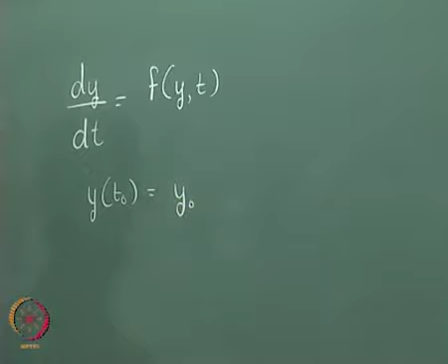So what we are interested in doing in case of ODE solving is find the value y as a function of t, starting with some value y0 given at time t0. We start with this particular value y0 and then try to get the overall curve y of t as a function of t. Let's say that if we have an analytical solution for this particular problem, it looks like this particular curve.

So what we are going to do is, the function f of y comma t at time t0 and at the value of y0 is going to be nothing but this particular slope that we have. This slope is going to be f of y0 comma t0.

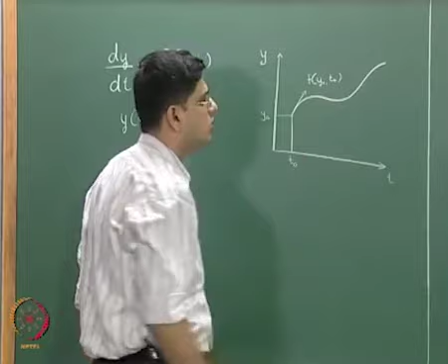So what we are going to do in ODE solving is use this particular value of slope in order to predict or move on to the next point, which is going to be y1 comma t1. Now this particular next point can either lie exactly on the actual curve, but usually there are errors associated with any numerical technique.

So what is going to happen is that the next point is not going to be the white point that I have shown. I am going to use white curves to show the actual curves, and yellow dots to show the numerical solution.

So in the ODE solver, based on the ODE solver, we will reach the point shown by the yellow x over here. Then the function value f of y1 comma t1 is going to represent the slope of the numerically computed curve.

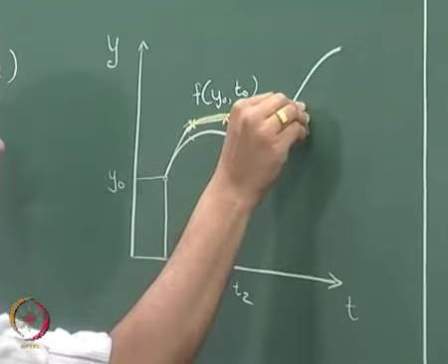Based on the slope we compute from time t1, we will move on to time t2, and the slope might be like this, and we might end up at this particular yellow point. We will keep continuing this over and over again, and perhaps finally the curve we get looks something like this.

So this is the numerical solution and this is the actual solution to the problem. So what we are interested in doing when we try to solve an ODE problem is getting the curve y as a function of t.

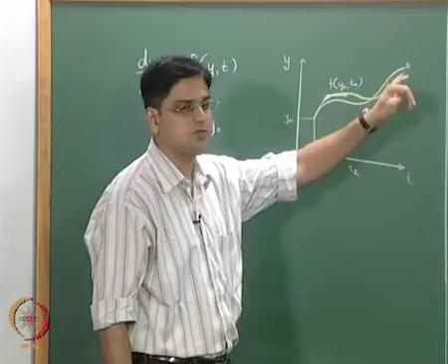Now when we are actually solving the integration problem, we are not interested in getting this curve y as a function of t, but instead we are plotting the function f of t against t. This function f of t represents the slope of this particular curve at various points, and let's say that slope f of t represents something like this.

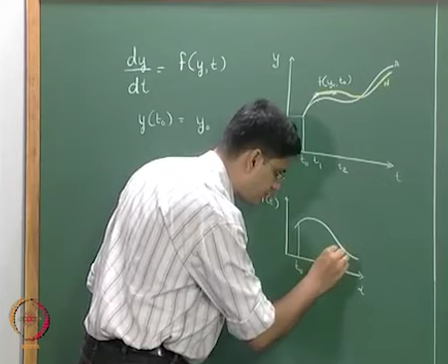In that case, the integral from a to b, or integral from t0 to tn, rather than saying t1 let me call it tn, that integral is going to be the area under this particular curve. Now the first difference we find is that for the ODE solver we have this function f, which can be a function of both y and t.

In case of an integration, it is going to be just a function of t. That is going to be one difference.

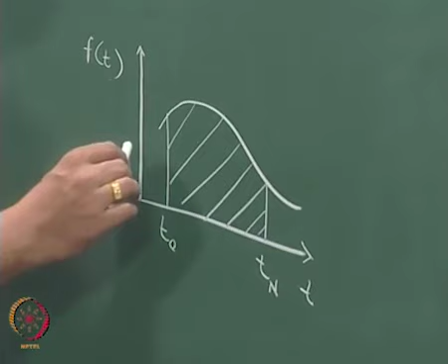The second difference is that the integral is an area under the curve, whereas in solving the ODE we are actually trying to trace the curve y of t rather than looking at the curve f of t. That is the other difference between ODE and integration.

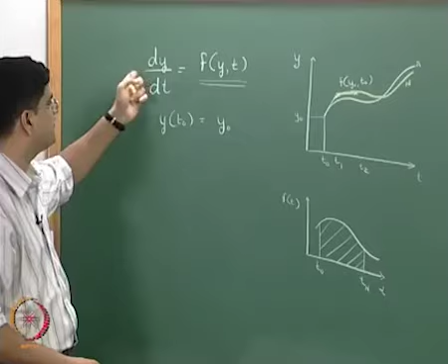The third difference is that because this function dy by dt is in general going to be a function of both y and t, the ODE solving method is going to be a more general way of solving these problems rather than an integration method. That is the third difference.

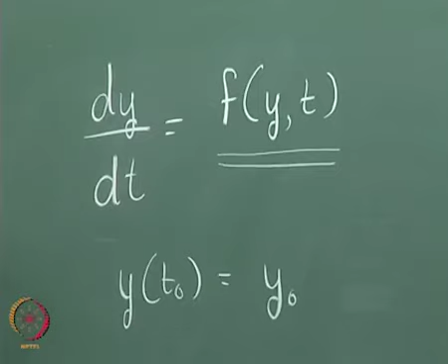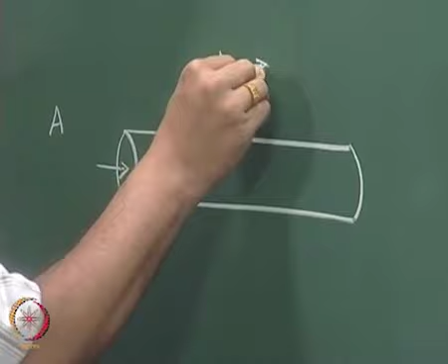Now let us look at the PFR problem. What we physically mean by the plug flow reactor problem is, let us consider we have a tube of this sort. Let A be the area of the tube. At the inlet, we have the system flowing in, a solution of any particular compound, let us call that compound A, and the reaction goes from A to B, and ACS is the area of cross section of the tube.

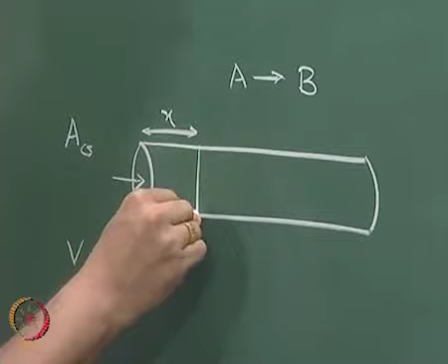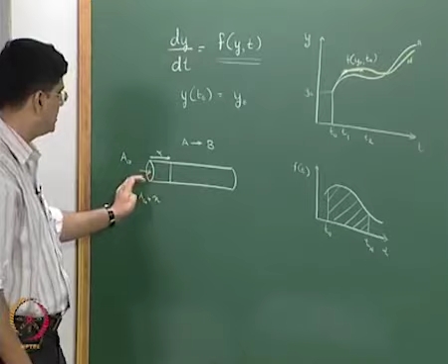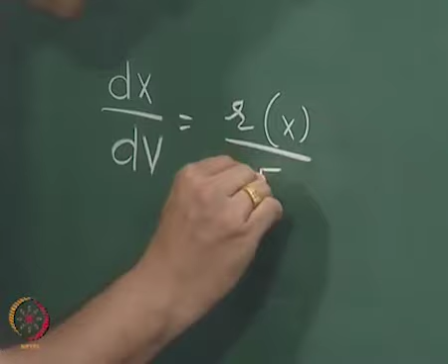So the volume is going to be nothing but ACS multiplied by x, where x is any distance from the inlet. So what happens is that species A keeps getting converted to species B because of any reaction that takes place within this system, and the overall equation for this system can be represented as dx by dV equal to the rate of reaction R, given as a function of x, divided by F. So this is what we get as dx by dV.

So now in the ODE solver, what we are going to do is find the conversion as a function of the volume of the PFR.

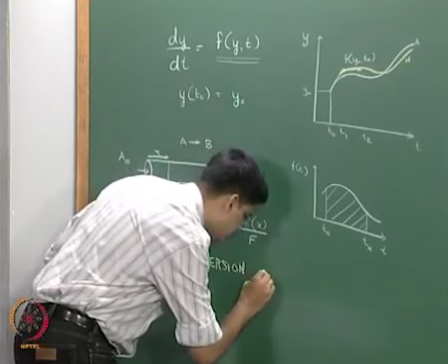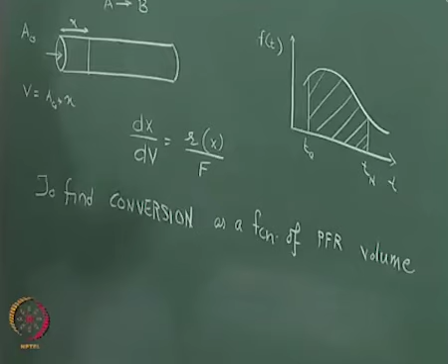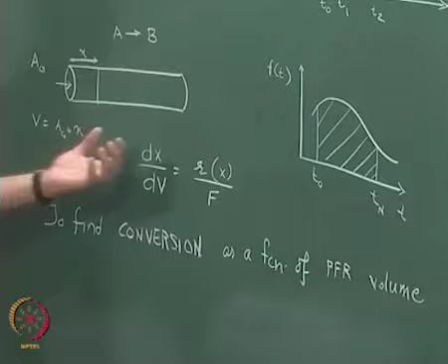If some of you have already gone through reaction engineering courses, you'll perhaps recognize this. If not, I'll give you an overview. As species A enters the plug flow reactor, it gets converted because of the reaction to species B, and this equation represents how quickly species A gets converted within the reactor.

X represents conversion, that is, what percentage of species A has been converted to species B. So what we get if we plot conversion against volume...

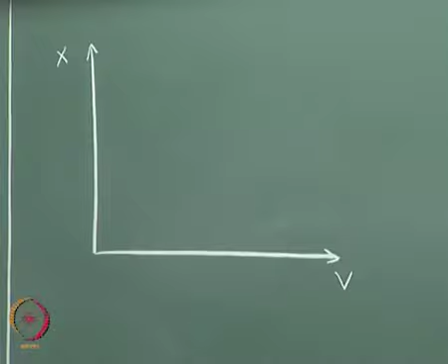Initially when the concentration of A is high, closer to the inlet, the rate of reaction is faster, so A gets converted very quickly. At the inlet the volume of the reactor is 0, and as we keep going towards the right, the volume keeps increasing. As the volume increases, the amount of A converted increases.

The rate of conversion of A is very fast right in the beginning because there's a lot of A available for reactions. As we go towards the other end of the reactor, as the amount of A depletes, the rate of reaction reduces. As a result, the conversion curve as a function of volume looks somewhat like this: high rate of reaction in the beginning, then it tapers off. Maximum conversion is 100%, the conversion cannot exceed 100% at any given time.

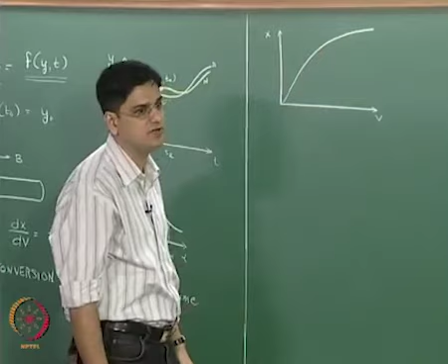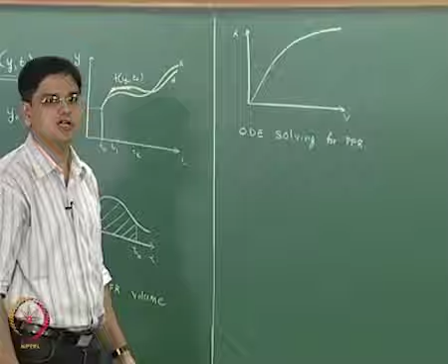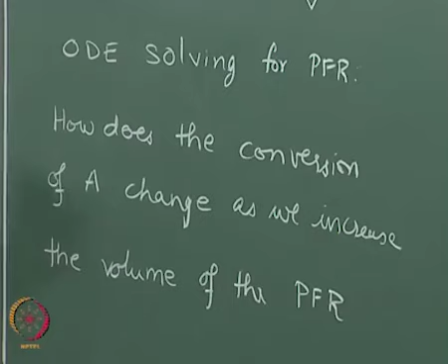So in ODE solving for a plug flow reactor, the question we are trying to ask is: how does the conversion of A change as we increase the volume of the reactor. This is the question that an ODE solver is trying to ask.

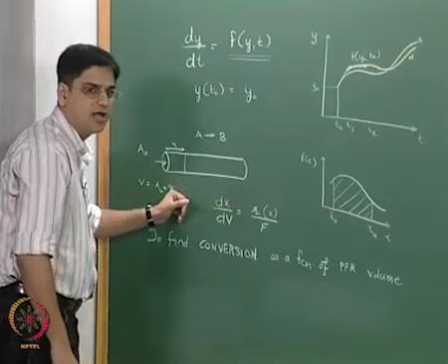Now we'll rewrite the same equation in a different form. We take dV on this side, and F by R to the left hand side, and write this as dx divided by R of x multiplied by F. I missed FA0 to keep it consistent with the previous lecture's notation: FA0 multiplied by dx divided by R of x is going to be equal to dV.

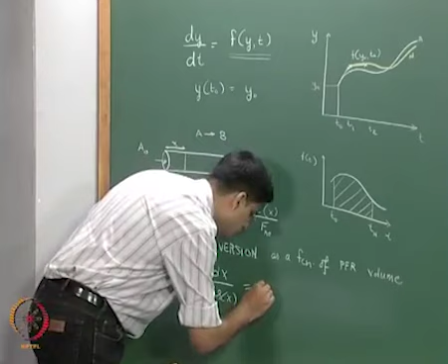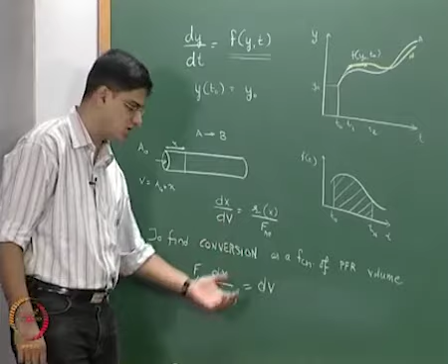Now if we plot 1 by R as a function of x, the volume required to meet a certain conversion is going to be the area under the curve.

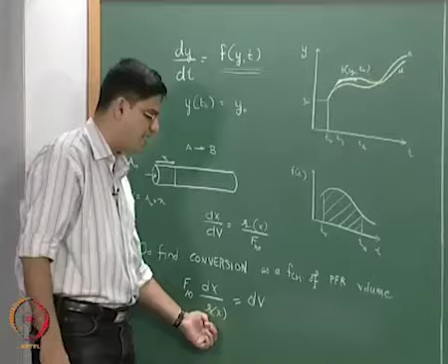So what we plot is FA0 divided by R of x, ignoring the negative signs, as a function of x. We plot how the value FA0 divided by R of x changes as the conversion changes, and let's say that value changes like this. So now the question is: what is the volume of the PFR required to meet a certain conversion?

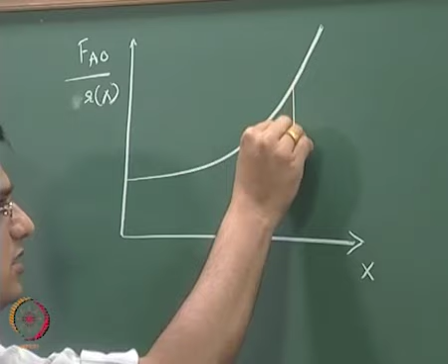In the previous module, we wanted to get 90% conversion, that means x equal to 0.9. So what is the volume that gives you 90% conversion? The volume that gave us 90% conversion was the area under the curve.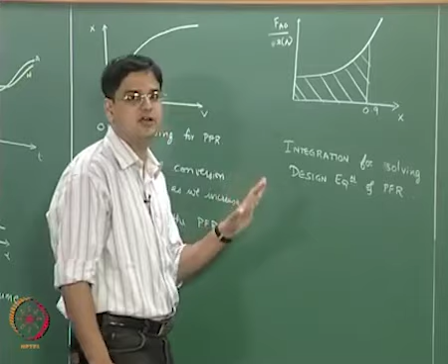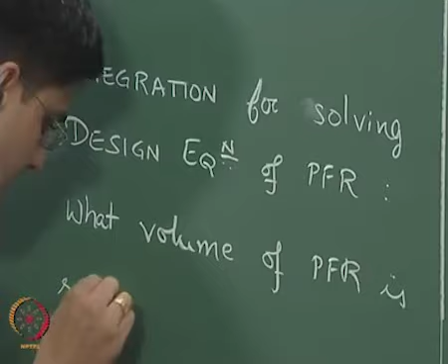So, integration for solving the design equation. ODE solving is for the PFR equation, and integration can also be used for solving the design equation of the PFR, but the question is put in a slightly different context: what volume of PFR is required to achieve a specific conversion value.

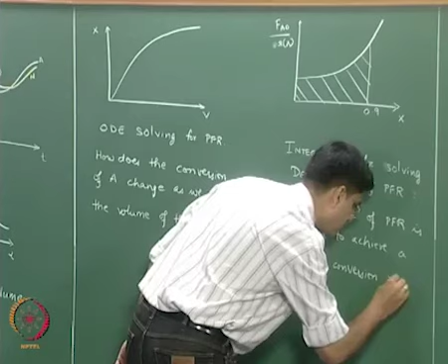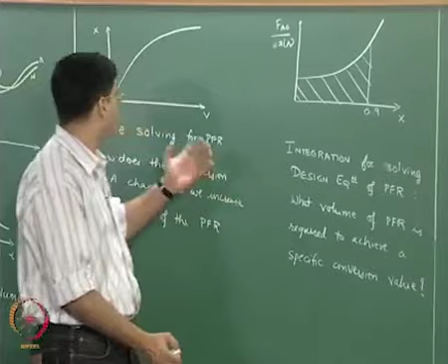So we have recast the same question in a slightly different way: what is the volume of PFR required to achieve a certain conversion. Now the question is, how can we use an ODE solver to answer the same question? The way we can use the ODE solver is to look at the point at which conversion is 90%.

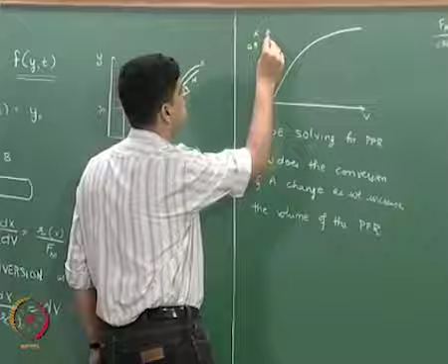So, at the point where conversion is 90%, draw the horizontal line over here. The value of the volume that you get is the volume of PFR that gives you 90% conversion.